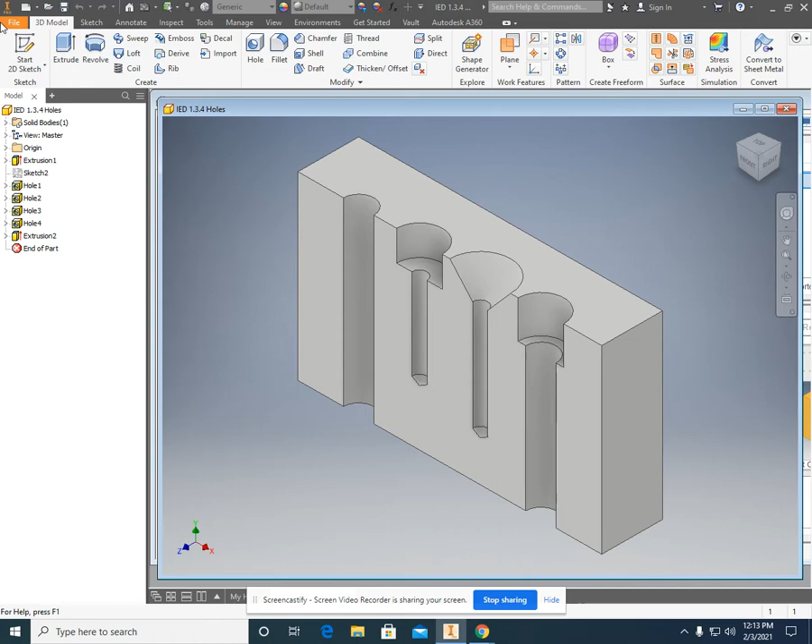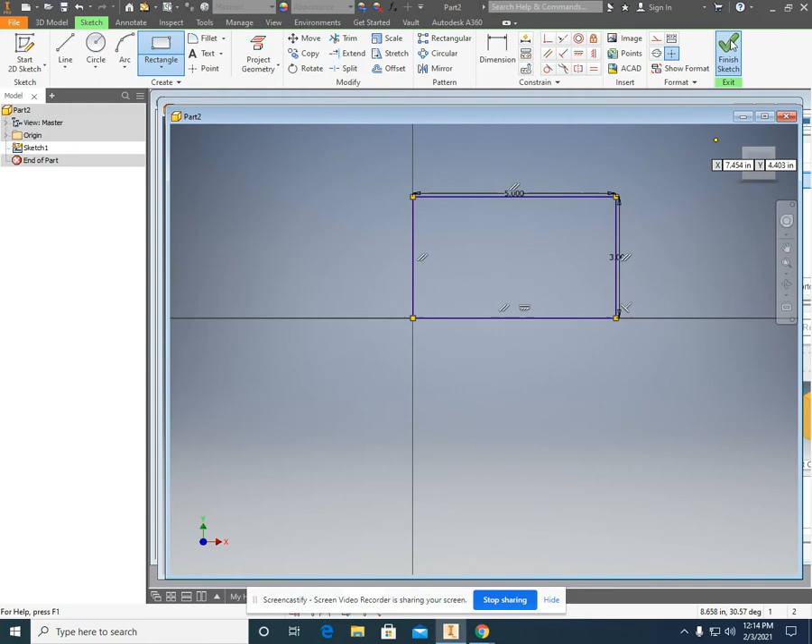So File, New, Part. We are going to start a 2D sketch and make a 3x5 rectangle. Click the Rectangle tool. Origin, go up, enter 5, then hit the Tab key, then 3. And that will make our 3x5 piece. Finish the sketch, and we are going to extrude it out 2 inches. So that is the beginning of our block right there.

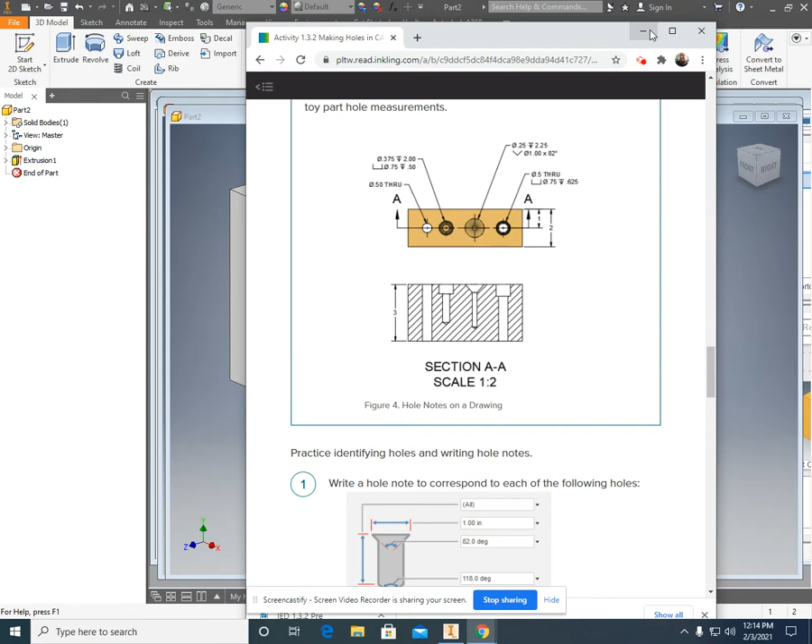Now, if we look at what we've got here, we've got 1, 2, 3, 4 holes, and they're on center. We can see that 1 inch right there, and there's 4 holes on center, which means we have to start off by making 4 points going on, and the points will be on this edge right here.

So start a 2D sketch. We're going to choose this edge right here. It zips on around. I'm going to flip-flop that right there so that we're drawing on this edge right there.

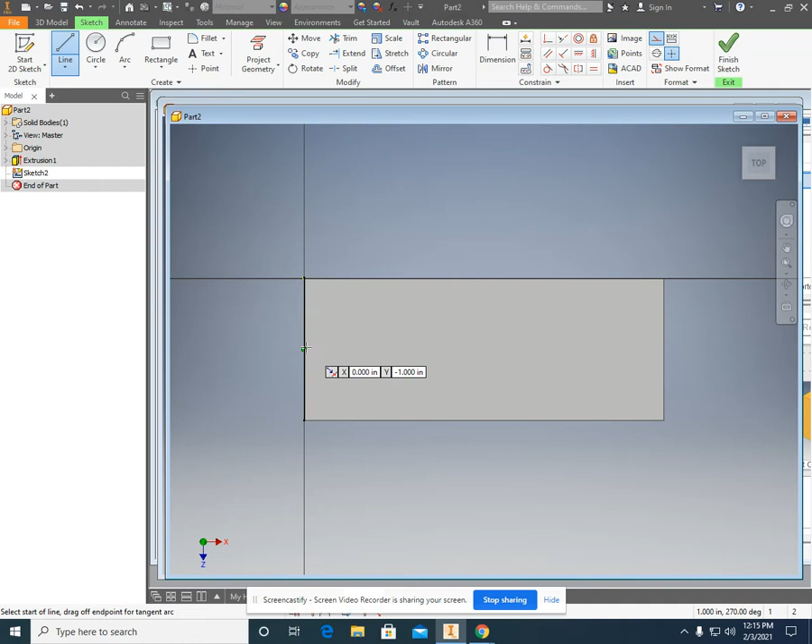Now, a new thing that you haven't done yet. If you look right up here, see this? It's the red sort of angled line, that's a construction line. A construction line is a very light dotted imaginary line, and it's going to help you line everything up. So what I'm going to do is click the construction line, then click my line tool, and allow it to index right off the middle. See how it goes green right there? Click it, and then come horizontal, allow it to index the middle. See how it goes green? Click it, and you'll see that on my screen, it is a dotted blue line. Dotted blue means it's not really there. It's just, you know, we can see it. It helps line everything up.

Be sure to click the construction line off right there. See how it's highlighted or not highlighted? Turn it back off. Otherwise, everything we do from this point on will be a construction line, and we want them solid lines. Now, we're going to put in our points.

So if we look at the schematic again, there's 4 holes. And what I'm going to do, click my point, and just on that construction line, let it index on there, let it click on there. 1, 2, 3, 4. Now this is where you go, oh, okay, the holes can be random. No, they can't be random. We're going to make these 1 inch apart.

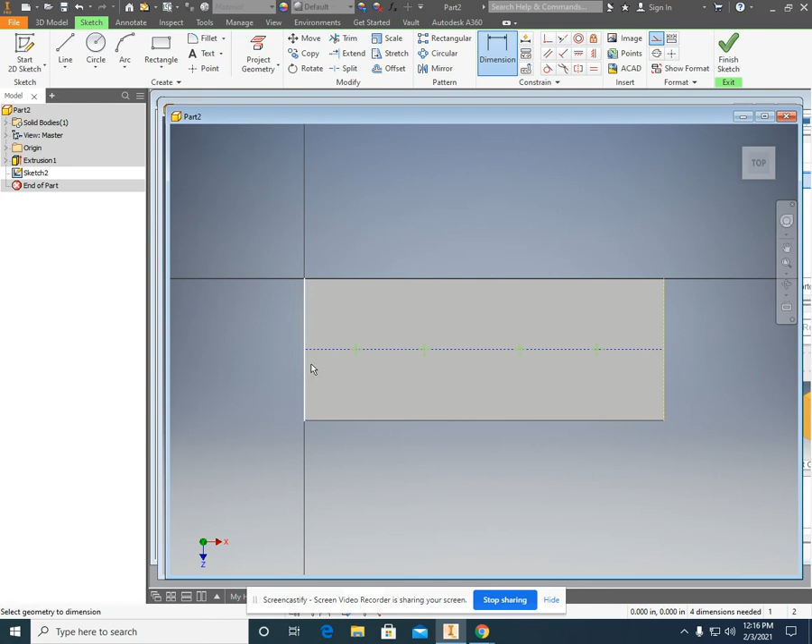So dimension, click the line, and then this point, and I am going to enter 1 inch. Then, same thing here, to here, I'm going to make that 2 inch. Here to here, we got 3 inch. And then here to here, we've got 4 inch right there.

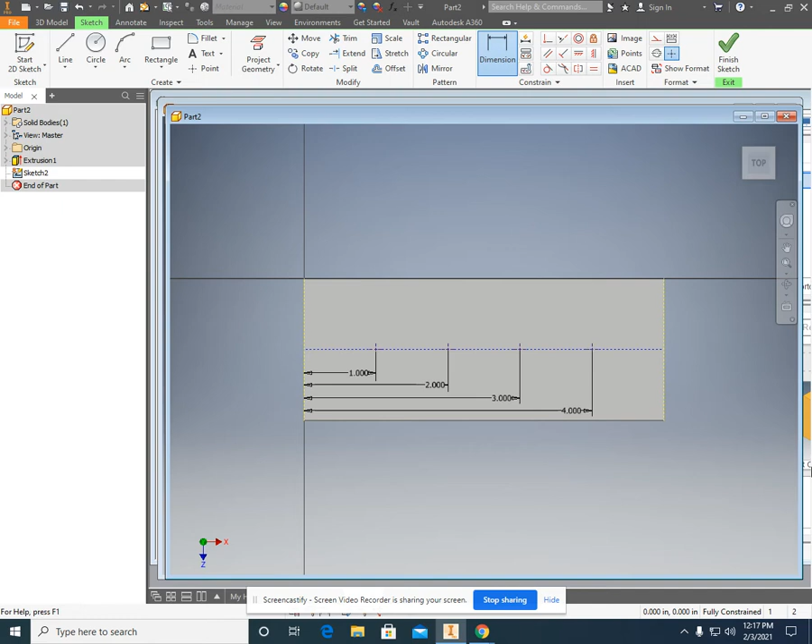Okay, so we've got all those and they're on center and they're looking great. Now I've got to finish this sketch.

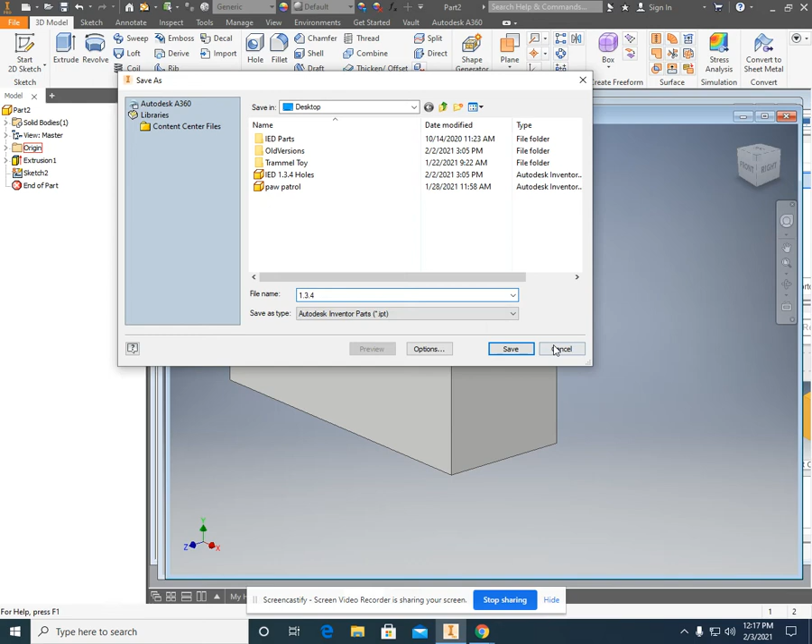And here is the number one thing in engineering: save early, save often. You see that it says part 2. I'm going to save this file, save as. I'm going to save it on my desktop. I'm going to save it as 1.3.4 so that I can come back and do whatever the heck that I need to do in order to make this thing work properly. If you don't save, if you turn off or you run out of time or your computer freezes, you lose all your previous work. So make sure that you save.

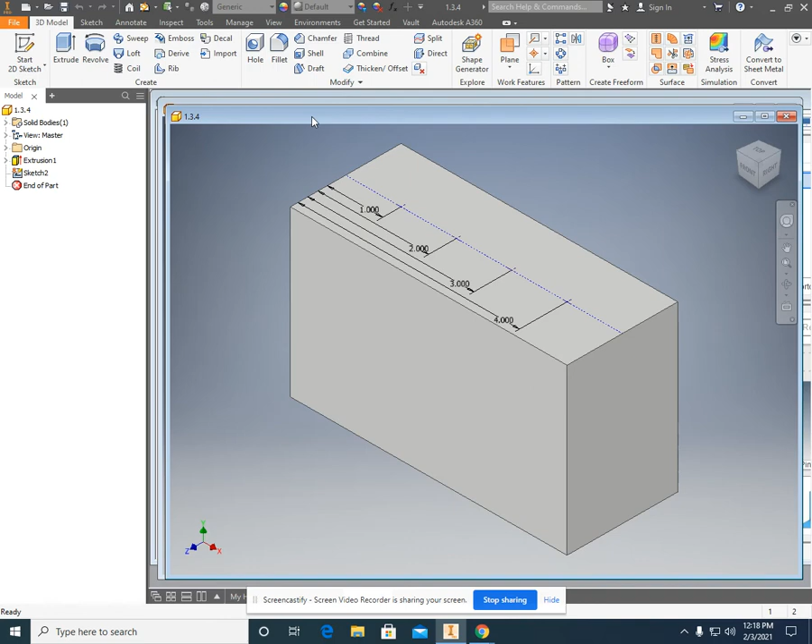Now it comes time to start putting in the holes. And if you remember from our previous video, we have the hole tool. If I click on the hole tool right there, it automatically selects all the holes. But we're going to want to do this one at a time. So I am going to deselect all the holes that I don't want right now.

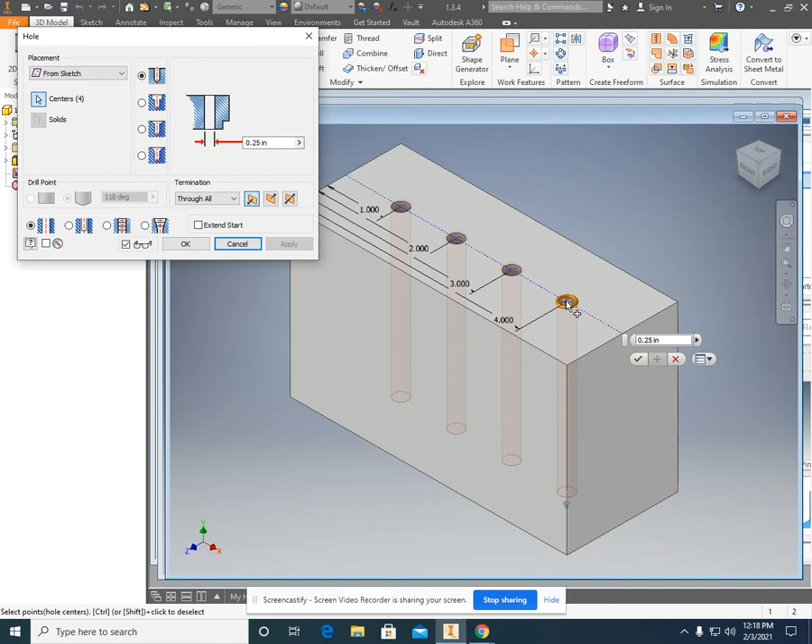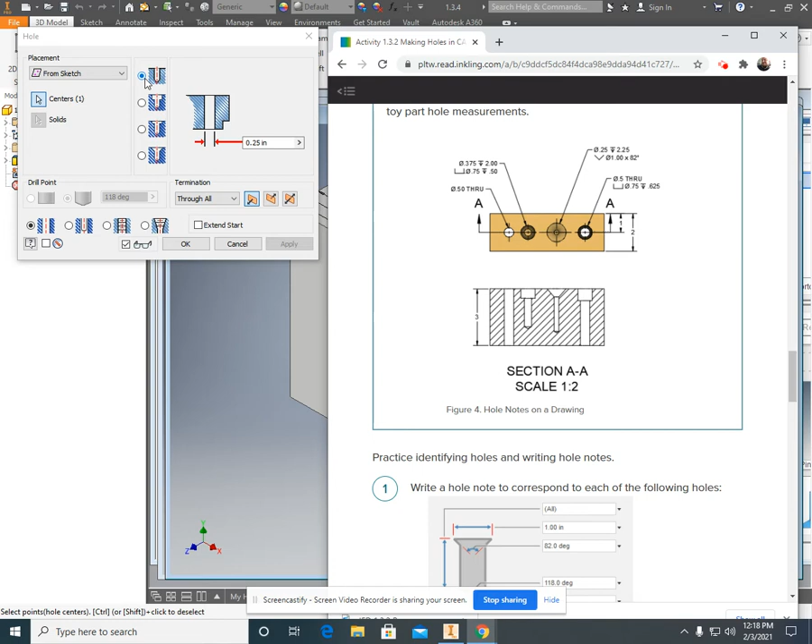Hitting the control key, click on the point, click on the point, click on the point. We're just going to deal with that first hole right here. Now looking at our schematic, the first hole is 0.5 diameter through. So right there, I've got the through hole option. It says through all, I need to change that to 0.5 and then click OK. And that gives us our first hole right there, which is a 0.5 diameter through hole.

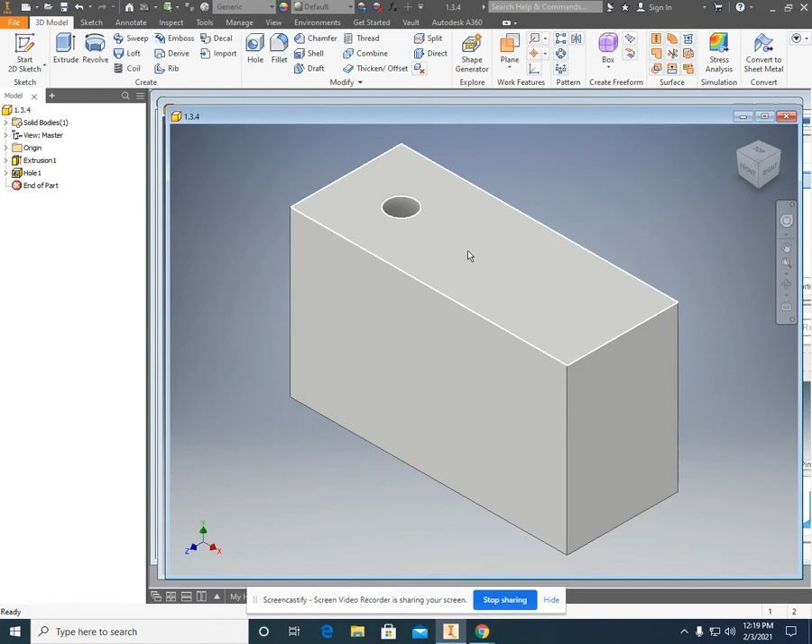Now you probably notice the points disappear. If you remember from our last video, we have to share the sketch. So again, watch, I go to this first, click on the little arrow right there, hover over the sketch, you can see them, they're ghost lines right there. Right click, share sketch, and now everything is back again, and we're all happy.

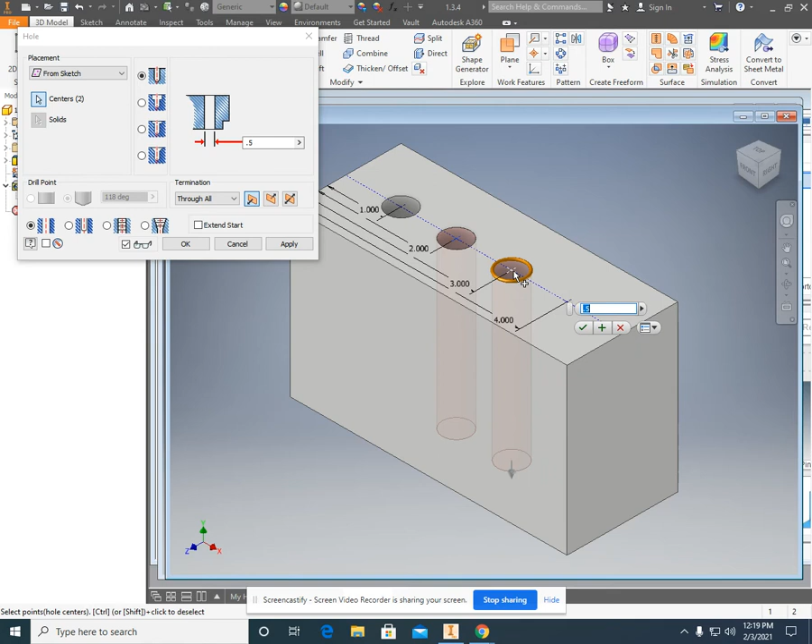Let's check out our second hole right here. Hang on, second hole, we've got a counter bore hole going on. So let me click on the hole tool, and again, deselect the ones that you don't want. Control key, deselect, deselect. And right there, now let's bring up our schematic.

And we want counter bore. So this is the counter bore hole. And please excuse me going back and forth. Let's look at this, it's 0.375 in diameter -- or excuse me, let's start with the counter bore. It's 0.75 and it goes down 0.5. So right here, 0.75, and this one is 0.5.

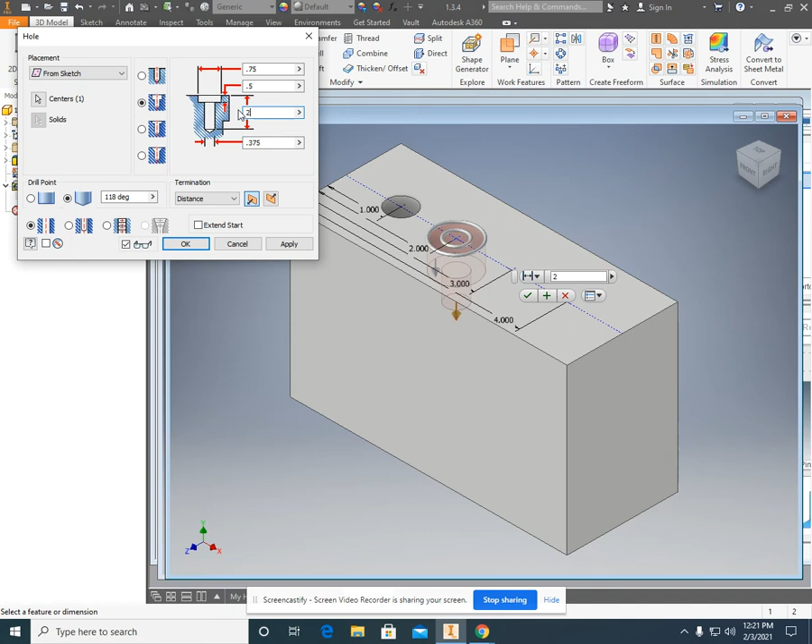Let's look at our schematic again. So 0.75 down 0.5, and let's see, we have a 0.375 hole that goes down 2 inches. So change it to distance. Let's get back here. 0.375 in diameter, and it goes down 2 inches. So 0.375, 0.375, and the distance is 2. Okay, so we can see it on this image right here. Click on apply and hit cancel right there.

That gives our second hole. Now let's look at the third hole. Third hole has a countersink going on. So let me use the hole tool again. Remember to deselect the one you don't want. Control key, deselect. And we're going to change it to the countersink for this third hole.

And let's look at all the schematics right here, all the blueprints. So the countersink is 1 inch in diameter and it's 82 degrees. So we got the 82 degrees, but we need to change this to 1 inch in diameter right there. And we have a 0.25 hole, and it travels in 2 and 1/4. So 2.25, and what was that? Was that 0.25? Yeah, 0.25.

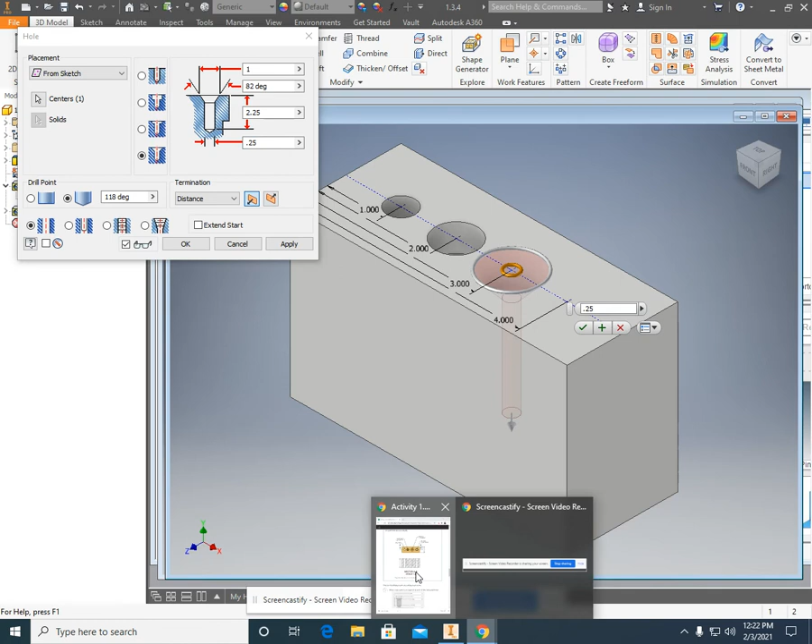So let's check this out again. 0.25 diameter hole, 2 and 1/4. So there's 0.25, travels down 2 and 1/4. 82 degrees, that's hot, and 1 inch in diameter. So that gives us that hole.

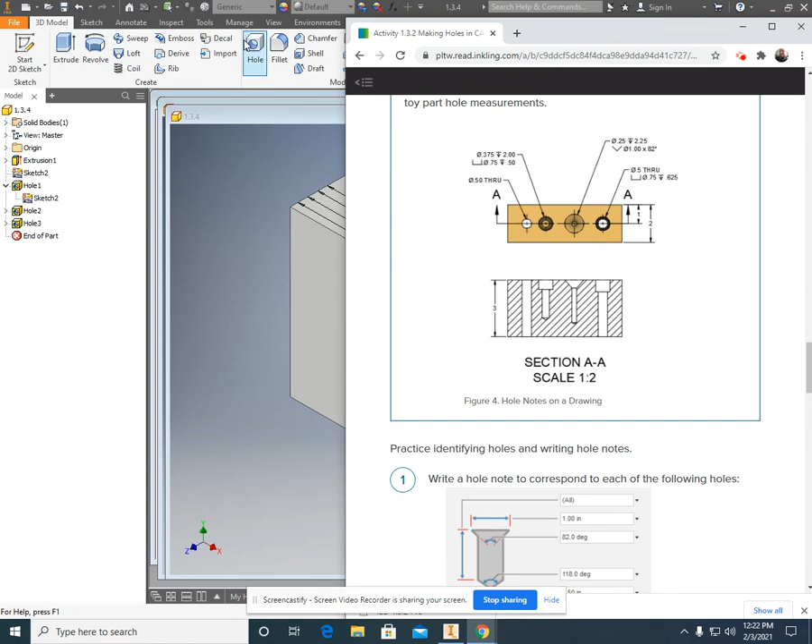Now finally, we've got our fourth hole. So what do we got here? We've got a counter bore, 0.75 in diameter, 0.625 deep, and it's a through hole. So let's do our hole tool, it'll select the last one. We've got a counter bore, and it is a through hole.

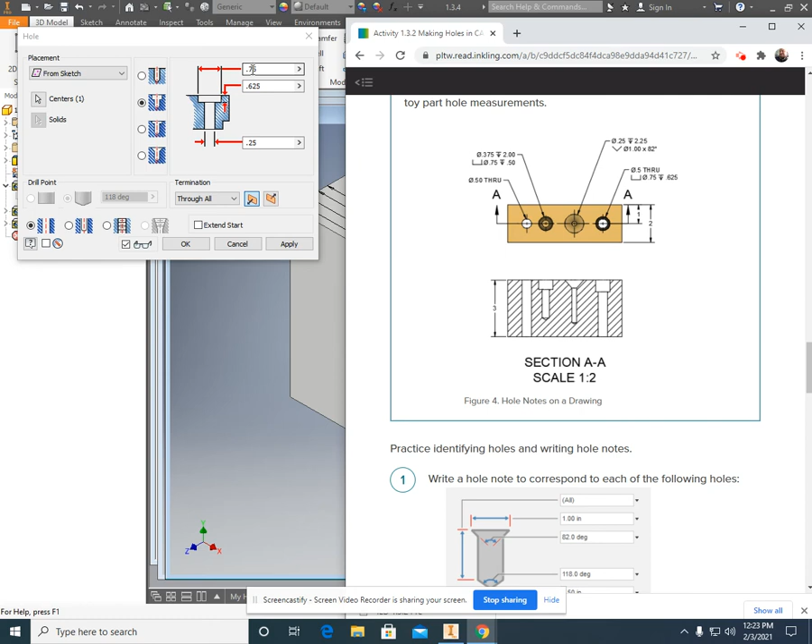Now our counter bore is 0.75 in diameter, 0.75, and it is traveling down 0.625. So 0.625, let's check everything right here. 0.625 down, 0.625 down, 0.75, and oh, it's a 0.5 through. So 0.5 right there, and apply.

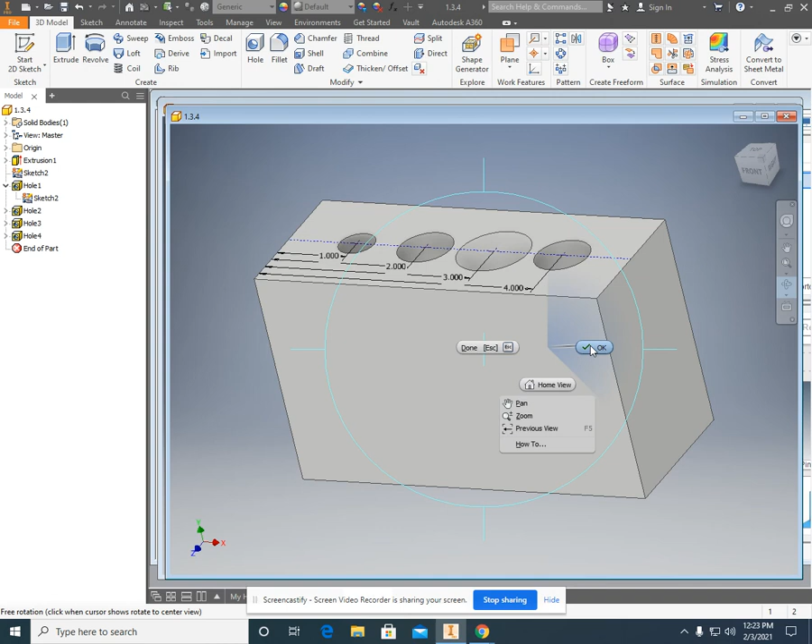And that gives us all of our holes right here. Now the question is, how the heck do we get from here to the other one, so we can see the cutaway? Well, that's really simple. If you remember, this is 2 inches thick right here.

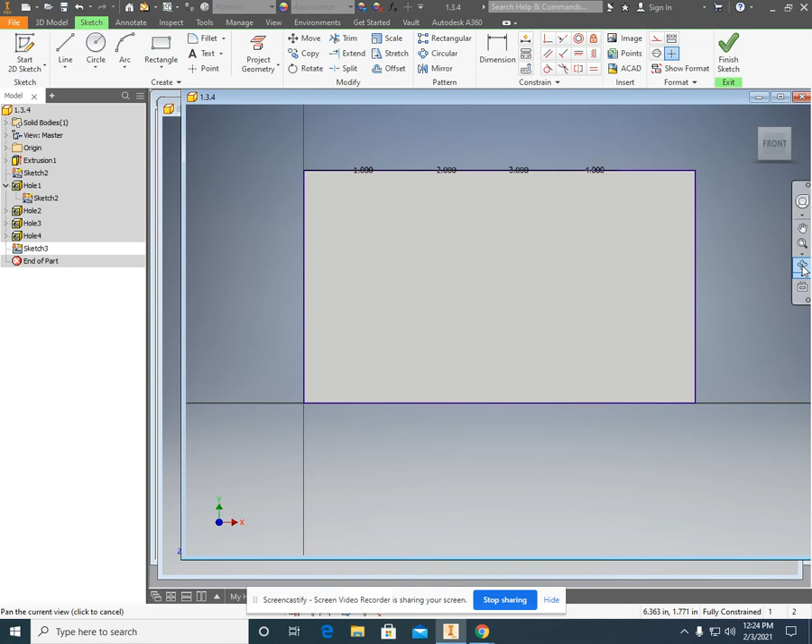So we're going to kind of do this an odd way. 2D sketch, choose this object right here, rectangle tool, and I am just going to copy the complete rectangle right there. Click OK, so all I've done is trace the existing rectangle. Finish the sketch. Now I'm going to extrude it 1 inch right here, but look at this, it says direction 2. So I'm going to cut away. So if I click on 1 inch, which is halfway, direction 2, wham, bam, right there, we've got our cutaway.

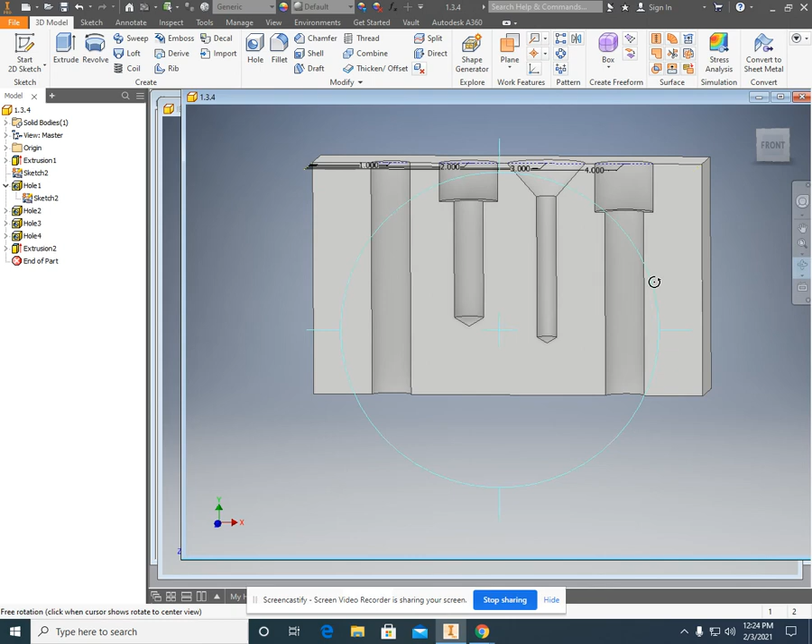Now you've got a whole bunch of floating lines right here. All we have to do is make those disappear. So find it on the left-hand menu right here, so right there, it's under the first hole most likely. I can right-click and visibility, and those disappear.

That, my friends, is how you go ahead and make this 1.3.4 block. It's kind of a confusing thing, but again, making holes and countersinks, counter bores is really incredibly important when it comes to actually engineering, because everything is put together with various fasteners. So that is this video.